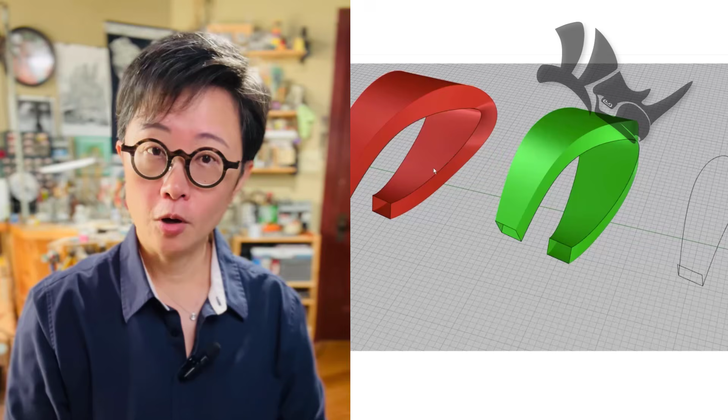This is PJ. Ribbon has been used in jewelry design a lot, but there's a challenge in how to make a better surface so it doesn't look like it's folding into each other.

In today's video, I'm going to show you how to use sweep two rail to create a better surface for your ribbon design. Are you ready? Let's get started.

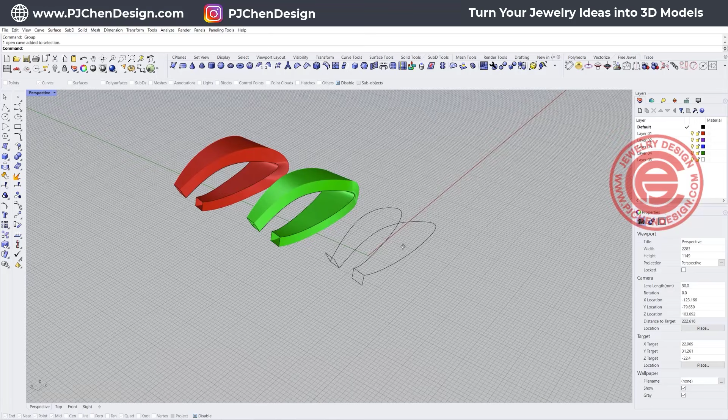Let's start with any of the curve structures that we have and see how we get this weird surface right there. Because a lot of times when you are working on the sweep, if you have a very tight corner, you may create something like this.

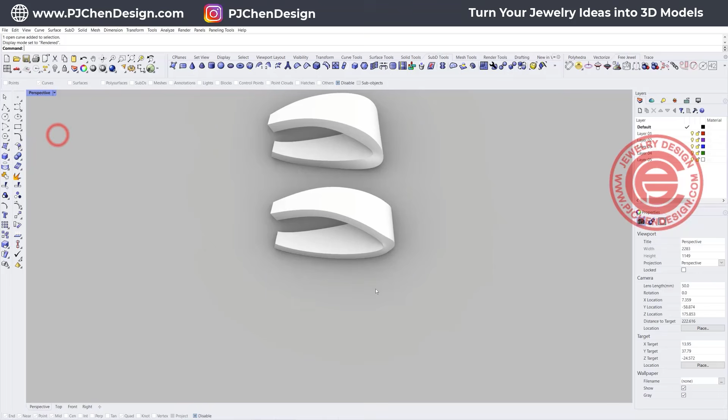It may not be a big difference if the piece is quite small, but it is a big difference once it's getting big, and this weird twist just doesn't look good.

So I'm going to show you how I still use the sweep tool but tweak it into a smoother way. First of all, you have those two curves that you have.

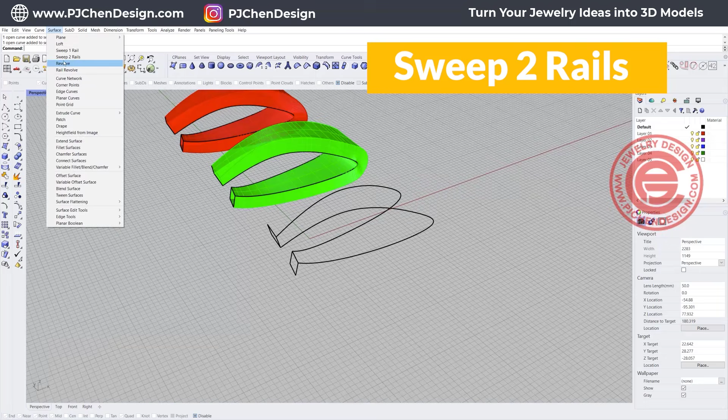Let me show you how I get that green one. We simply just go to sweep. This is rail 1, this is rail 2. You got cross section 1 and cross section 2 right there. Once you click OK, that's how you get that.

Now to fix this, you can see that we are twisting there. To fix it, we need to do some additional steps.

Once we're getting into this surface, we need to have a lot more curve and make sure that all the surface that we're trying to edit is controllable.

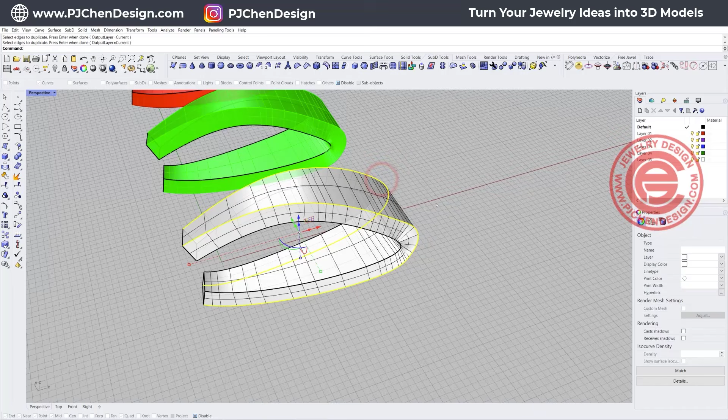So I'm going to use the duplicate edges, click on this one, and hit enter. Then I will delete the surface that we built.

Notice that if you're just looking at this edge, you're going to see it has a weird bend there, and that causes the problem. So what we're going to do is rebuild this one.

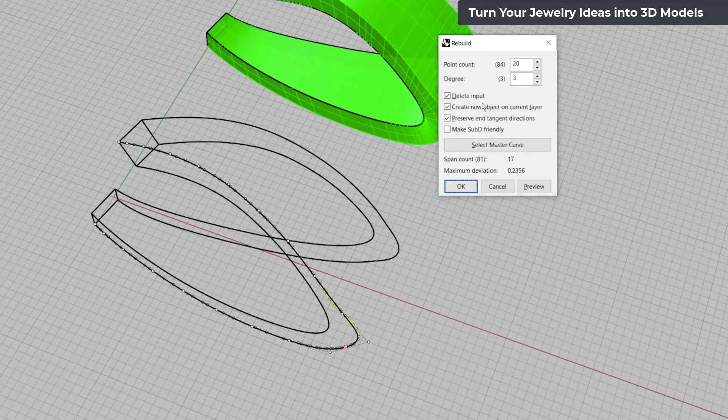Every time you rebuild, it's going to make it smoother, and I'm going to make it 20 points with a little bit of deviation. That'll be fine, but it allows me to edit with the last point right there.

I'm going to rebuild this one too with the same point. Now, because I do not want to have that tweak here, I'm going to look at all three views and do some editing.

For example, this one, I'm going to move it more like this way. That one, I'm going to move it down. Let's do it one by one.

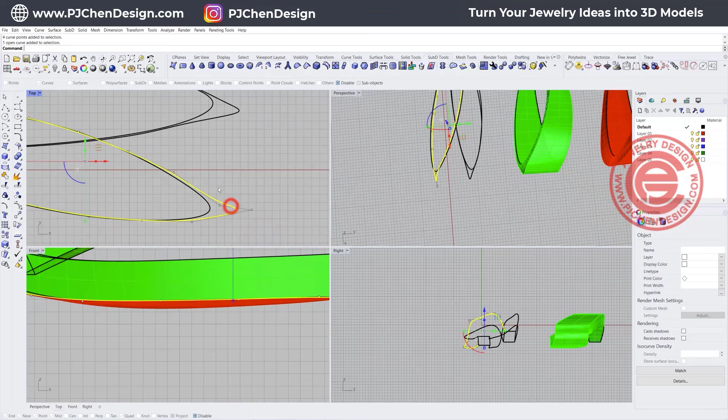I'm going to have this point moving up a little bit, this point moving down, so on the top view they look smoother.

The same thing on this curve. I'm going to move this one up, move this one down, and I don't want it to curve back, so I want this one going down like this. Now we have a lot more nice curve there.

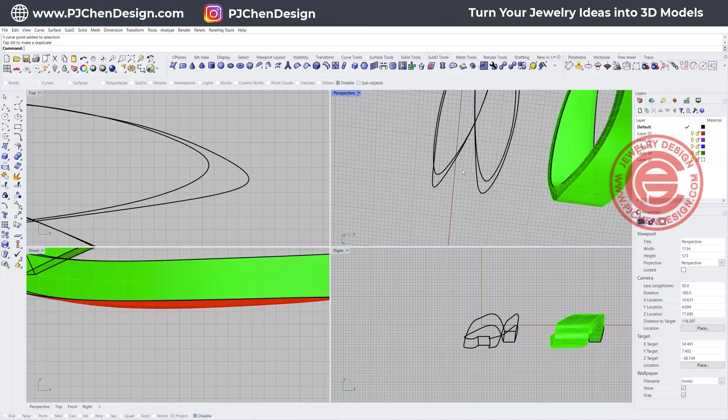I'm also going to hide everything behind it so it's not bothering us. So let's go ahead and hide this.

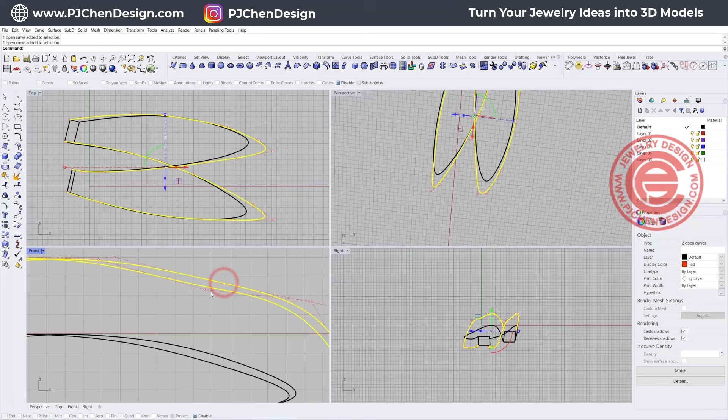When I'm looking at these two new curves, I'm going to mark them in red color, easier for you to see. Now you can see there's also a weird kink over here, so I'm going to move those two up just for them to get smoother.

Now this one maybe moving down a little bit. You want to move one direction at a time. You do not want to move all directions in the control points, it will look really weird.

Double check to make sure this is nice. You can see this is a little tweaked here, and especially there's a little bump there. You might want to turn on the control points. You see there's a bump there, we might want to move this down.

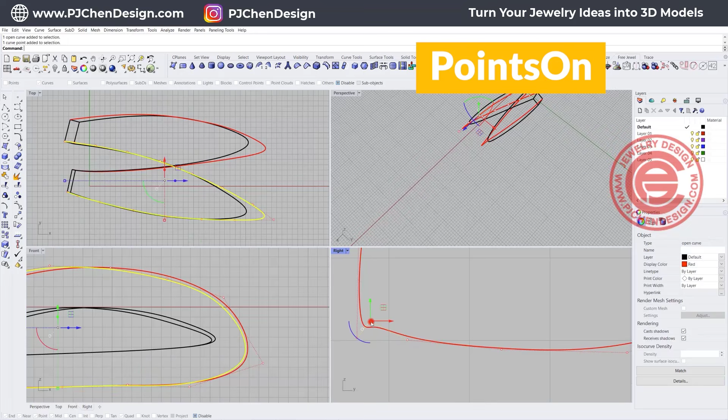So all three views, they have to look nice on all three views, and you can see this is a little bit kinked right there. So maybe this one and that one are going to move up, this one moving down, or moving this one up.

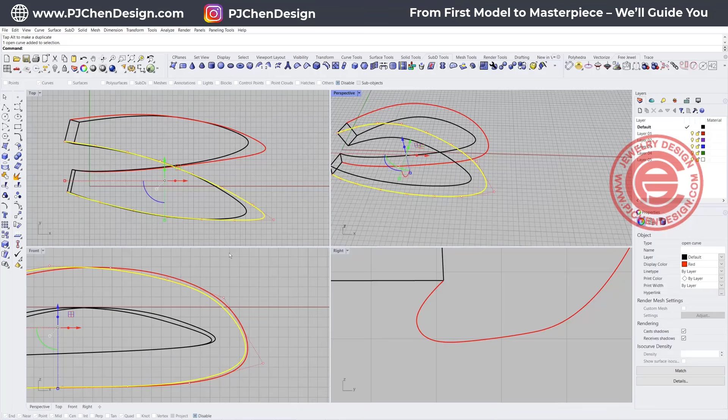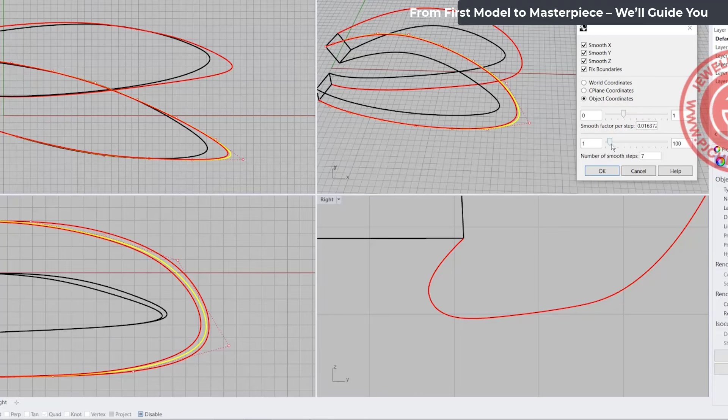So you kind of want to tweak it in a way that on all three views, they all look nice. Another way you can do it, if you're not willing to tweak on all three views for whatever reason, is try to use the smooth command. With the smooth command, you can move the bar and really quickly you can see they get smoother, but it also has a lot more deviation, which may change your design too much, so you may want to just tweak it like what I just did. Let's click OK.

So now we have all of this, and how are we going to sweep all of this together? No, you cannot, because Rhino only has sweep 2. The most you can have is 2 rail.

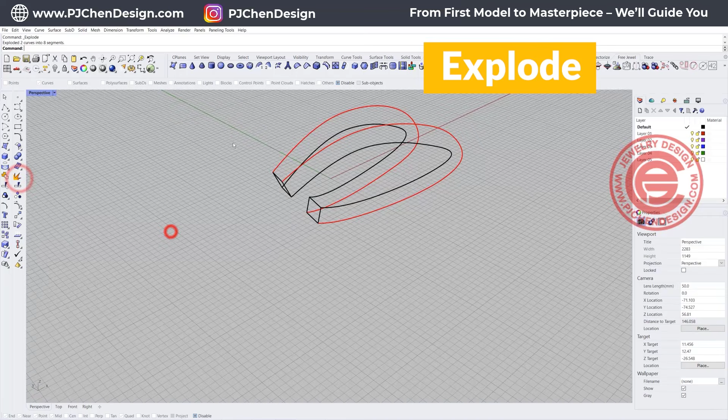So I'm going to have this one exploded into 4 sections, and we're going to sweep one by one. Yeah, you heard me right, we're gonna sweep one by one. We're gonna sweep this one and this one, and we're gonna go from here to here, and hit enter. Again, we're gonna sweep this one and this one, go from here to here, and hit enter.

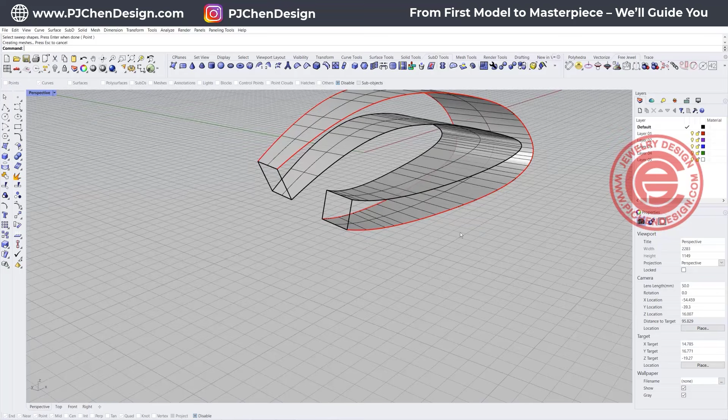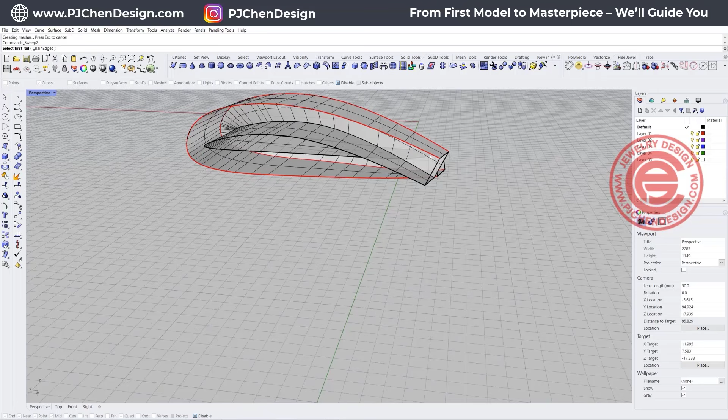Now I have the outside, it's done. I just need to work on the inside. Now we have this red one and also this one right here, and we're gonna pick up this side and also pick up this side, then we got something like that. Keep in mind that all of them have to snap together in this case, otherwise you're going to have naked edges. Do one more time, this curve here, this curve right here, snapping on here, and also snapping on this curve right there. Okay, so now once you have everything, let's join everything together.

And by comparison, you can see this one is a lot better, it doesn't have that weird tweak. Now, one more thing I wanted to show you - if you feel like on this single surface it still has some kink there, which you don't have here, but just in case you have a kink there.

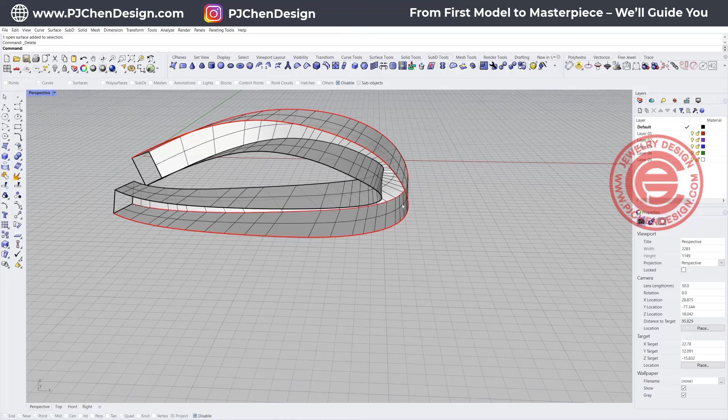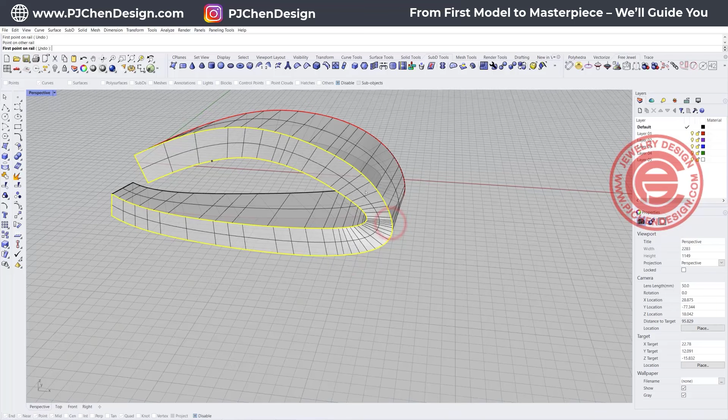What you can do also on the sweep tool, you can pick up the rail first - this is rail one, this is rail two - and you pick up the cross section here and here. Before you hit enter, you do have an add slash option, so you can add a slash right here to adjust any of the kink that you think it might have there, and then just click OK, and it will be smoother.

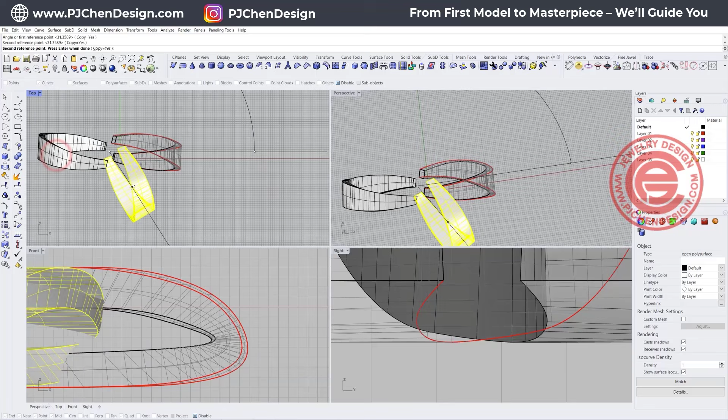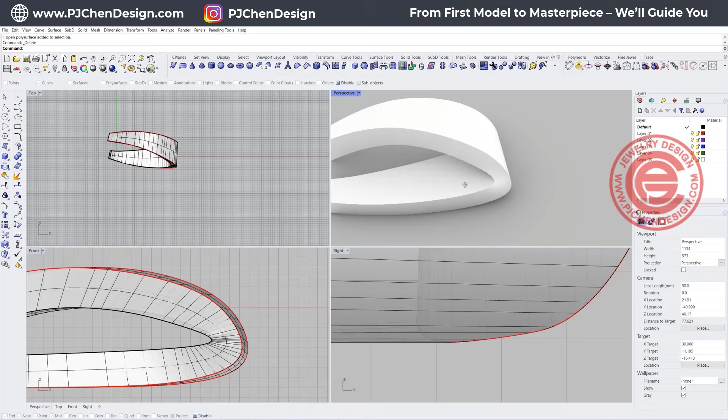Once again, once you're done, you can join them. This will be good practice when making a ribbon. Maybe you want another one mirrored from this part to this part as a ribbon, and you want to tilt it, and there will be some sort of structure right in the middle - I'm just gonna drop a ball there, for example. Maybe that's something you want to play with, maybe you want to do a polar array, whichever your design is, but having a good starting surface with less kinks will look much better on your design.

I hope you enjoy this video, and this little trick can help you create better surfaces.